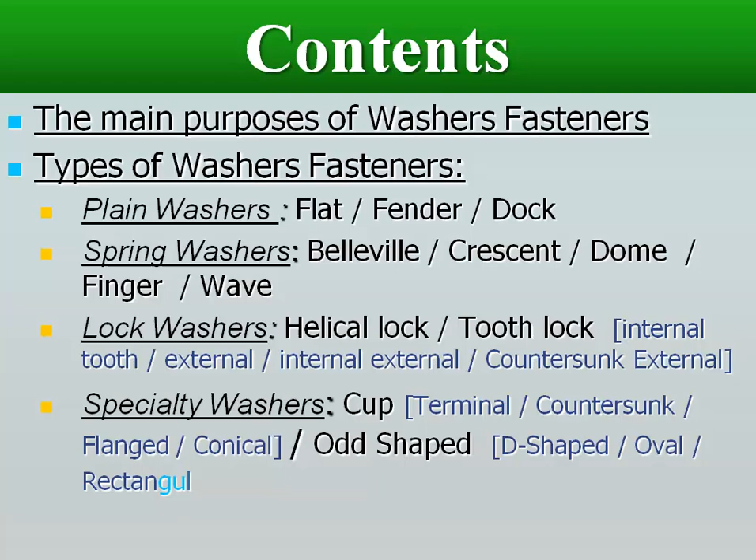A washer essentially acts as an extension of the bolt head, causing greater distribution of force on the surface of the material being fastened into.

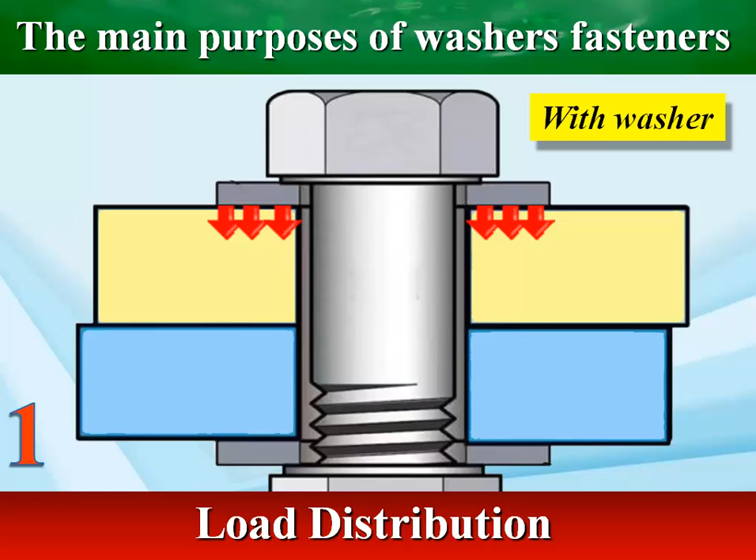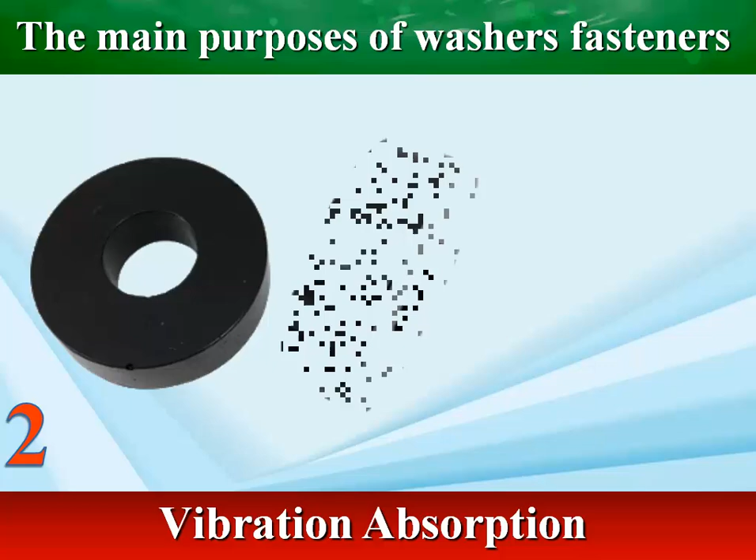An anti-vibration washer is designed to reduce vibration and noise in mechanical systems. These washers are typically made of a soft, flexible material, such as rubber or silicone.

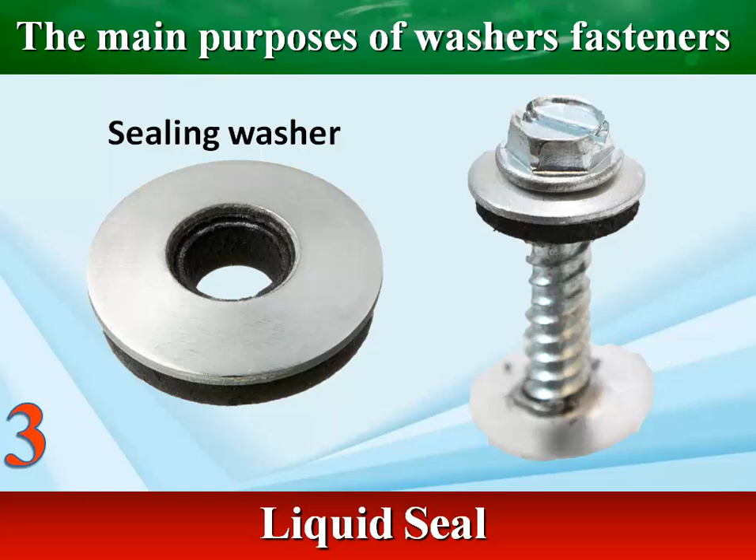Some fasteners need to be waterproof or provide protection from other liquids. In this case, a washer will provide a seal to protect the screw and nut assembly and prevent any leakage.

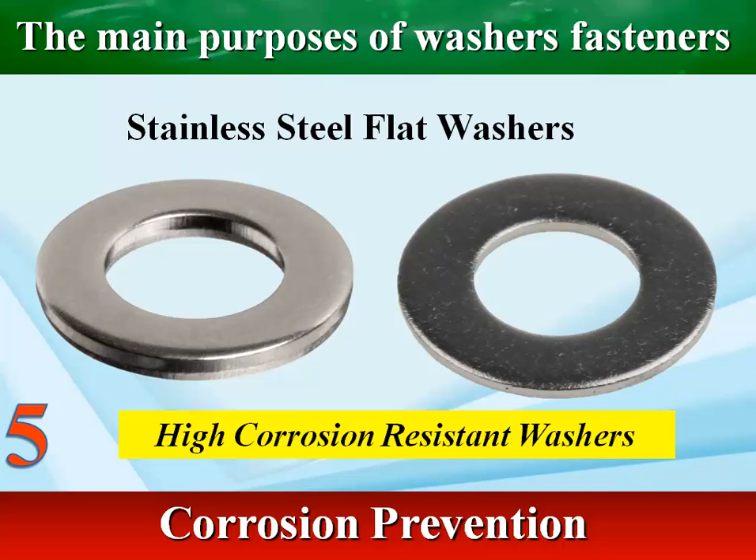Washer fasteners made from corrosion-resistant materials offer additional protection against corrosion and rust.

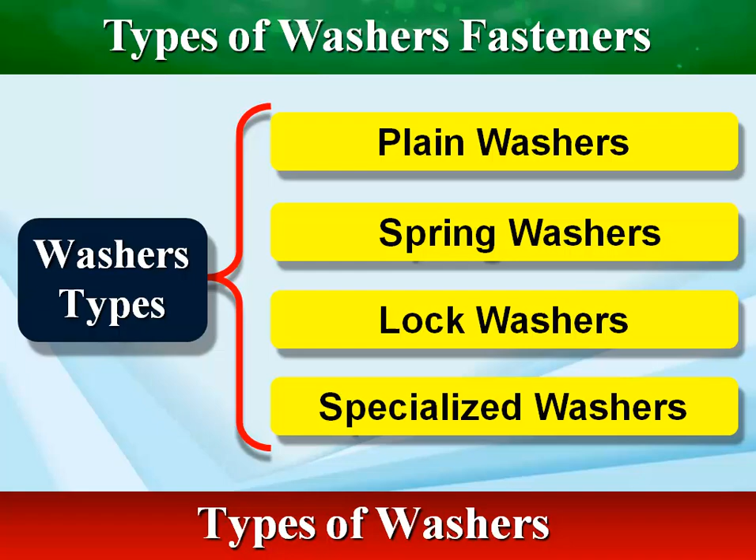Plain washers are the most popular kind. A plain washer is simply a steel disc with a hole through the center.

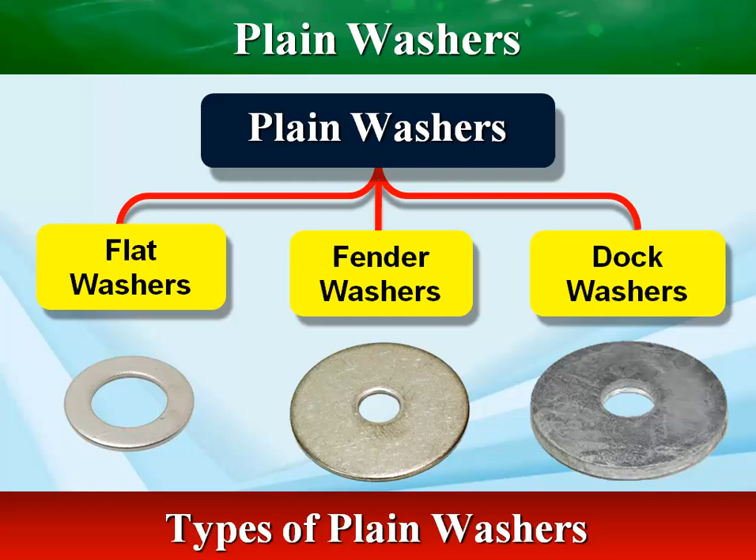Flat washers are thin, flat, and circular general-purpose washers with a centrally located hole.

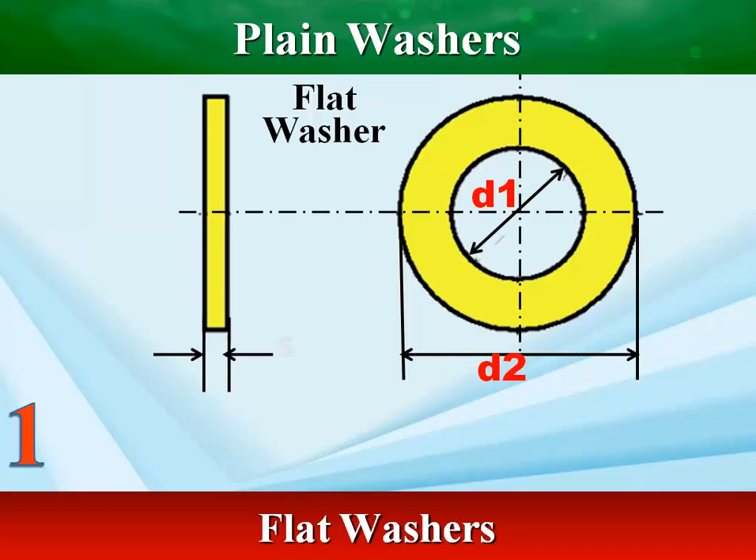Fender washers are oversized flat washers used to further distribute the load, especially on soft materials.

Dock washers have a larger outside diameter and are thicker than standard. Dock washers are used in construction applications where low-carbon, thicker washers are required.

Spring washers are discs of metal formed in an irregular shape so that when the washer is loaded, it deflects, acts like a spring, and provides a preload between two surfaces.

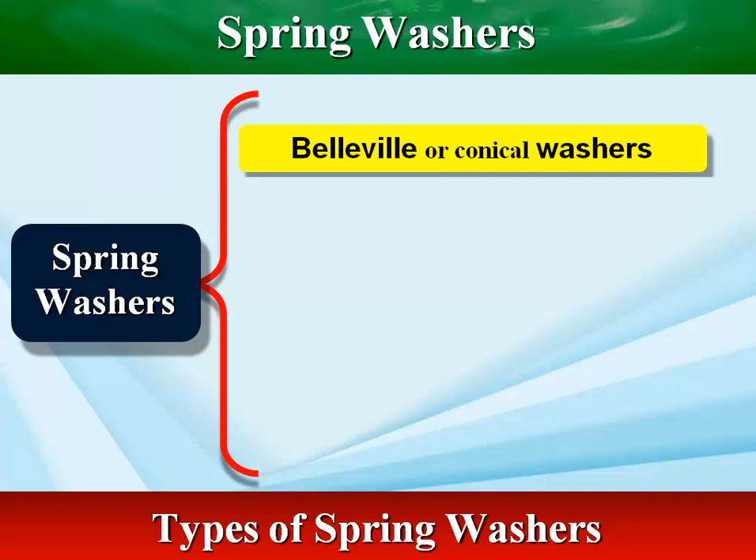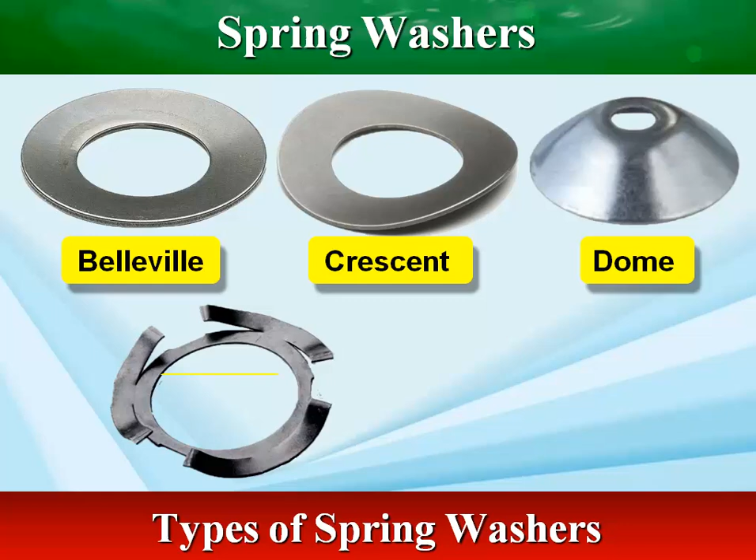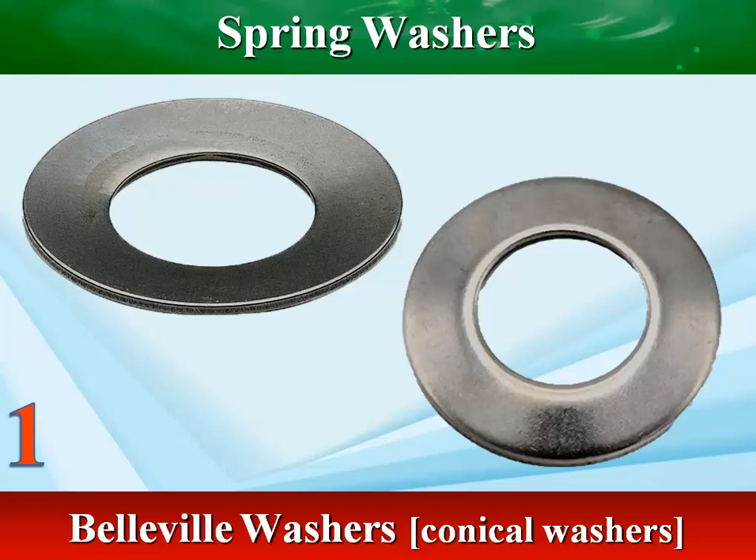Belleville washers have a slight conical shape, which provides an axial force when deformed. Belleville washers are cupped spring washers that flatten out as pressure is applied. They absorb vibration and shocks.

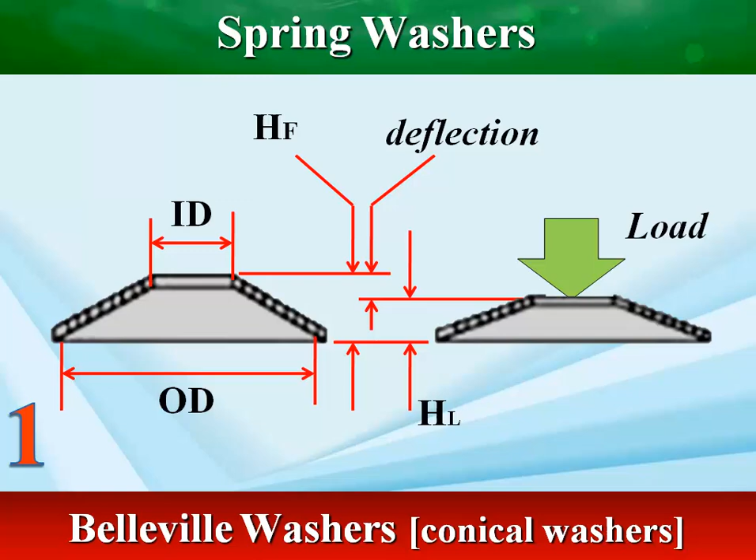The crescent spring washer is curved in only one direction, therefore there are only 4 points of contact, so they exert only light pressures.

Dome washers have a very high load capacity with a small overall deflection. Dome washers are commonly used in applications where assemblies need a part to eliminate side play, control rattle, and maintain assembly tension.

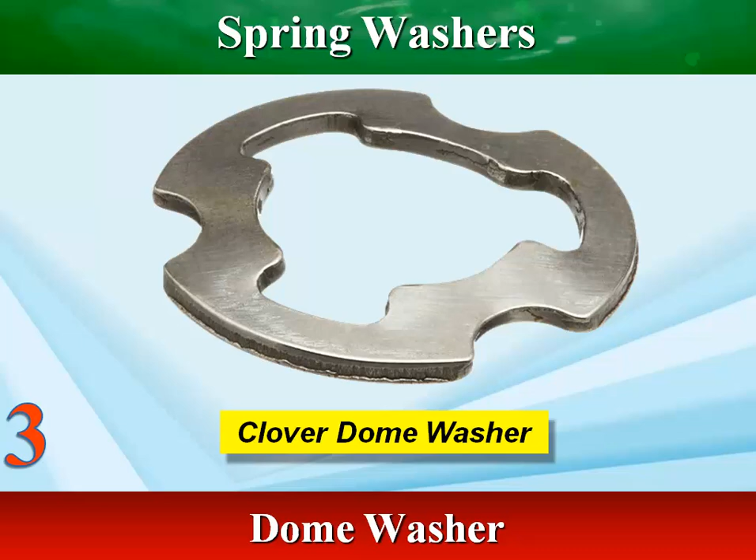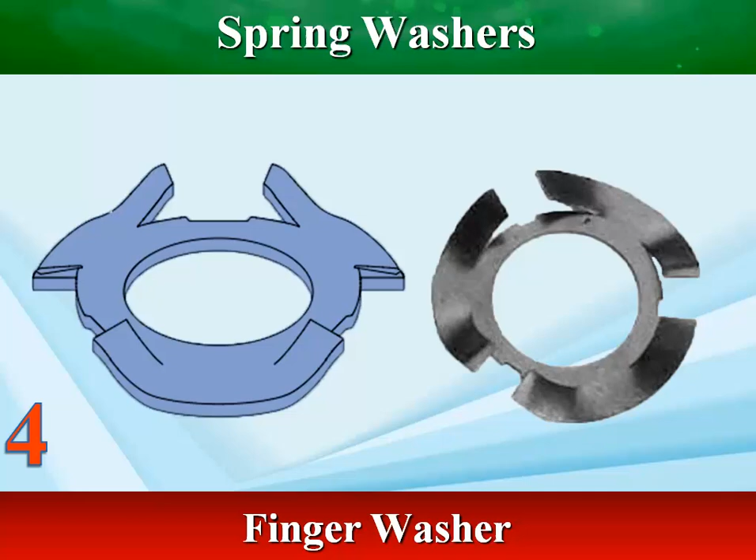Finger spring washers are notable for their split construction with protruding flanges. They are common for counteracting noise, excess wear, end play, and vibration dampening capabilities.

Wave washers provide spring pressure when compressed, offer moderate load capacity and deflection, and are typically used as cushions or spacers.

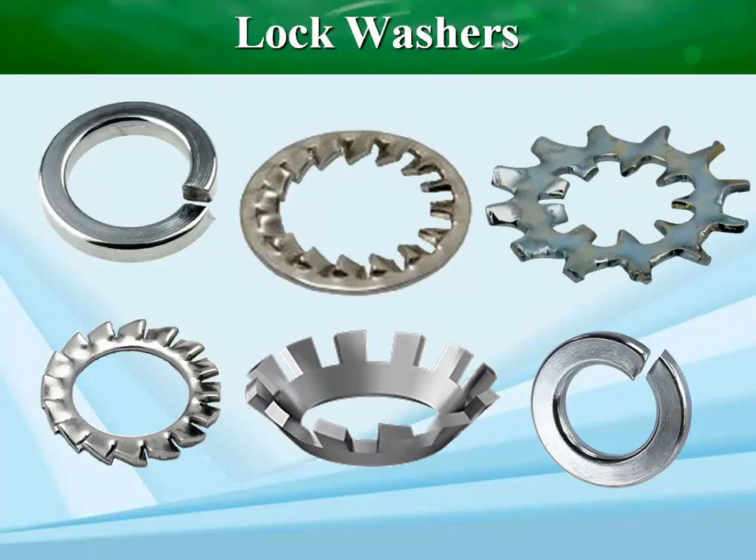Lock washers secure fasteners that tend to rotate or lose friction. The washer exerts a load, partially deforms, and locks a fastener in place.

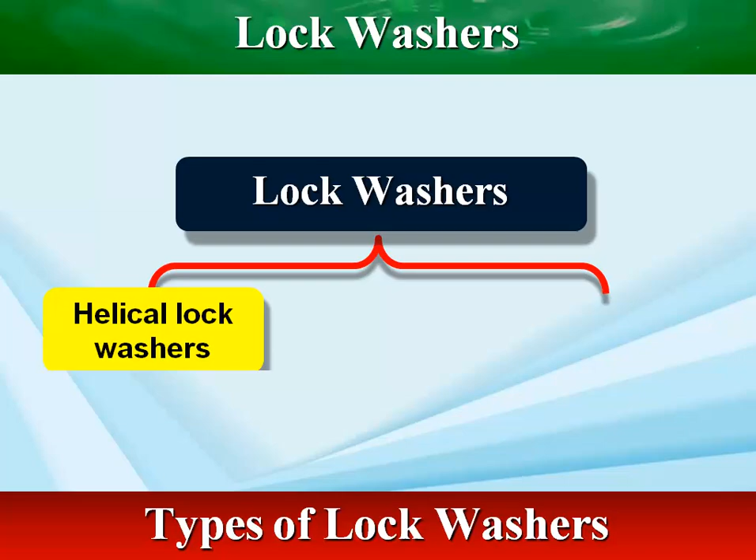Split lock washers have a single coil of non-continuous flat wire filament. When secured, the lock washer flattens while each coil end bites into the mating surfaces.

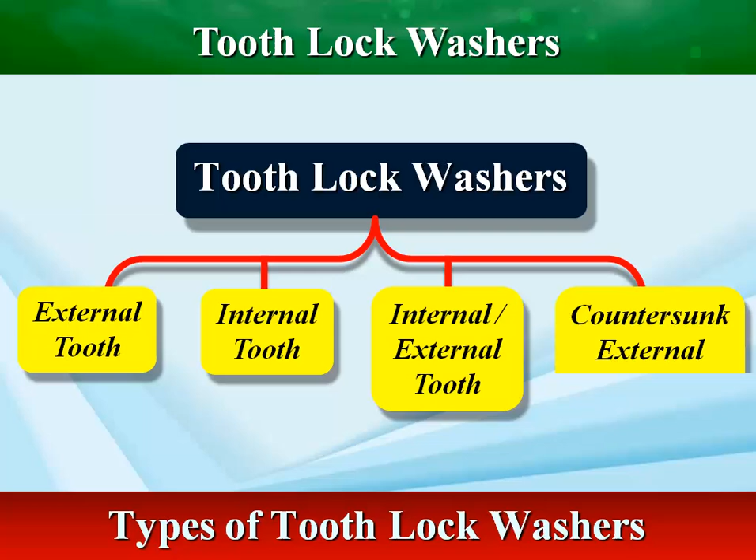Toothed lock washers have many sharp, heat-treated teeth to dig into the surfaces pressing against them, to keep the fastener from loosening.

Terminal cup washers are used to prevent a wire from slipping out from under a screw head.

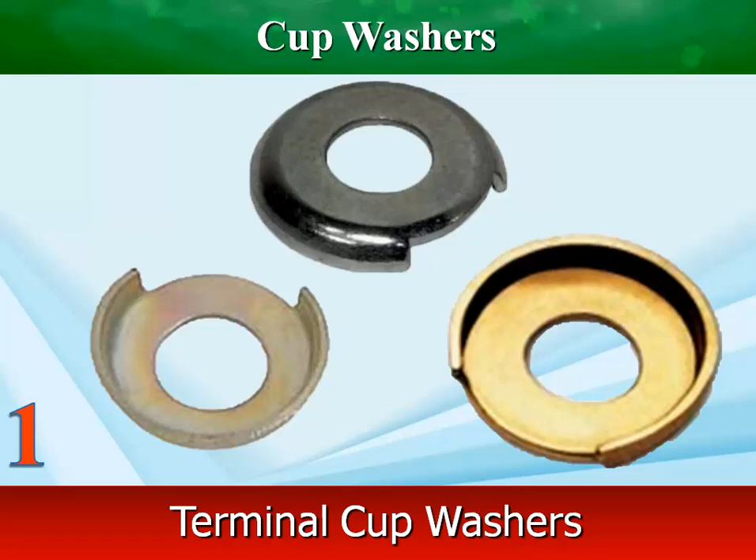Countersunk washers have a countersink that captures the head of the fastener, and when secured they provide a flush surface.

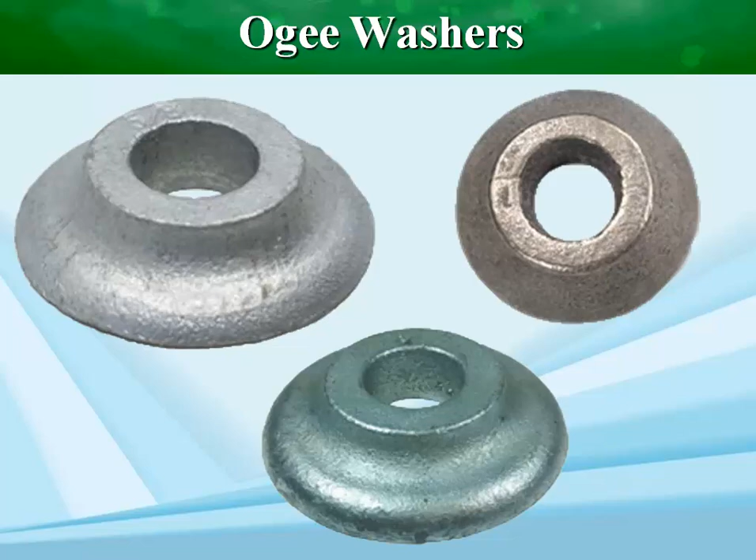Ogee washers are thick, large diameter, cast iron washers with a curved or sculpted appearance and are used in dock and wood construction.

Sealing washers are commonly used in roofing and plumbing applications that require a stronger seal. Sealing washers are slightly conical metal with a bonded neoprene or rubber backing.

Torque washers have 4 sharp prongs that dig into the material, anchoring the bolt and preventing rotation of the washer. They are commonly used with carriage bolts in woodworking applications.

The shoulder washer is a plain washer type with an integral cylindrical sleeve. Shoulder washers insulate and protect screws, wire, and tubing from corrosion.

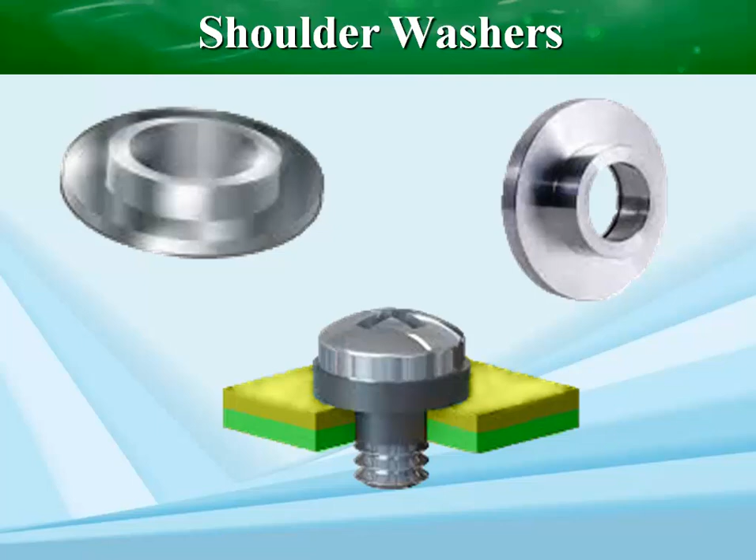Tab washers are locking washers that contain a side tab, key, or notch feature that can be bent against the side of the fastener to keep it from loosening.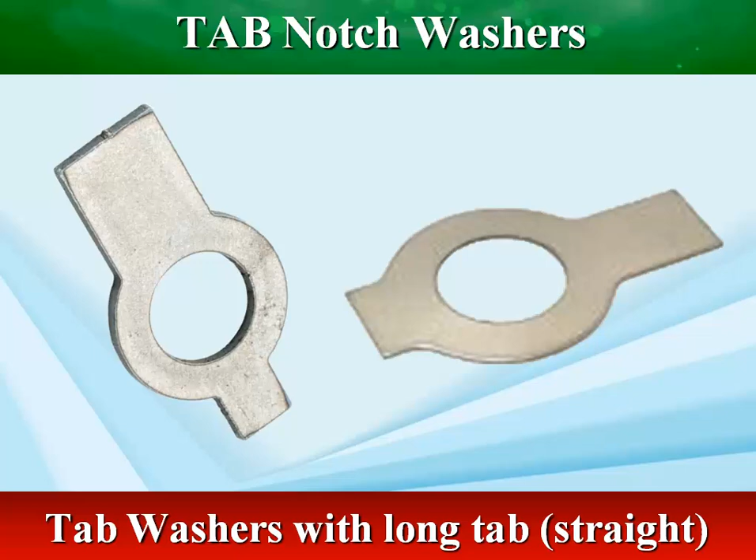Tabs may also be internal to the washer to prevent the assembly shaft from rotating.

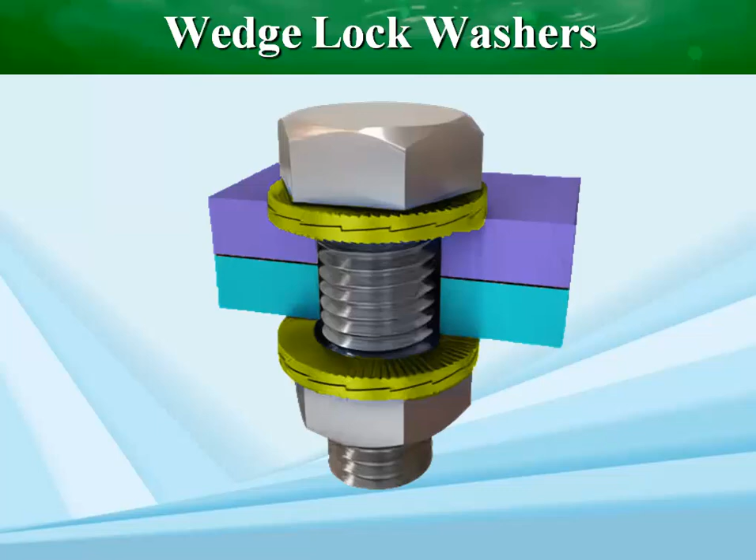Wedge lock washers are self-locking washers composed of two pieces, pre-assembled, with both serrations and wedging action of the half. The pair of joined washers feature cams on one side and non-slip ridges on the other.

Wedge lock washers use wedges or cams to provide tension to an assembly that prevents loosening when under load.

Spherical washers are heavy-duty two-piece washers. The top washer has a convex spherical radius, while the bottom washer has a matching concave spherical radius.

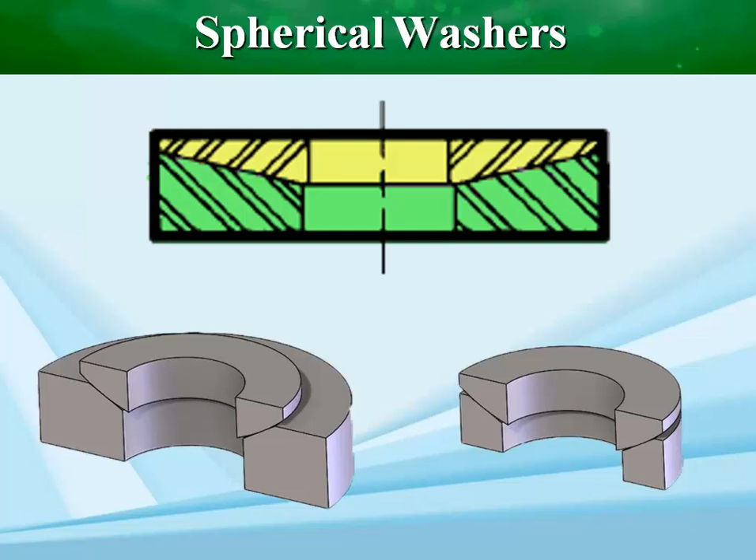Convex and concave washers are used to transfer clamping forces when the clamping surfaces are not lying parallel to one another.